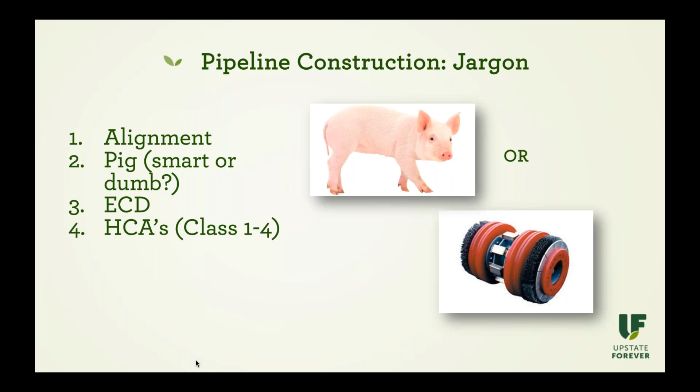And HCAs, that is a high consequence area. Essentially, it's a blast zone. They have different classes, 1 through 4, along the pipeline. Class 1 is the lowest risk, considered rural, 10 or fewer homes within 220 yards of the pipeline for any given one-mile stretch. Class 2 generally has 11 to 46 homes or apartments within that same 220 yards for any given one-mile stretch. Class 3 is 46 or more, or areas of public assembly such as churches, daycares, or schools. Class 4 is where buildings of 4 or more stories are prevalent, so it's pretty much an urban area. The reason those are important is they determine the depth at which the pipeline is buried, and we'll go into that a little bit more.

Now the basic components of pipeline: you've got your right-of-way, that's what you see there. There's a construction right-of-way versus a permanent right-of-way. For example, on our 55-mile pipeline, which was a 12-inch pipe, compare that mentally to say the 36 to 42-inch Atlantic Coast Pipeline. Our construction right-of-way, which you're looking at in that photo, was 75 feet, and the permanent right-of-way will be 50 feet across. That is the negotiated right-of-way for the pipeline.

Then there are access roads. Those can be temporary or permanent. Some are going to be temporary for construction, others permanent. They have to get at the pipeline to do certain things over time. There are laydown yards, those are temporary, just associated with the construction part. That's where they store things like the pipe and other equipment. Then there are the ATWS, additional temporary workspace. Those are sort of like laydown yards, just additional workspaces along the pipeline path. In our case, those ATWSs ranged from 1 to 18 acres in size.

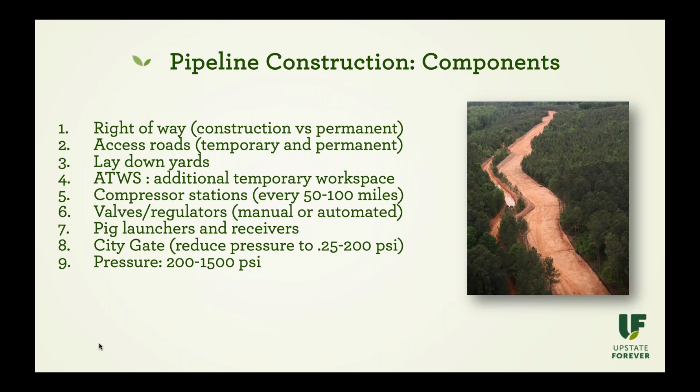Now, process. This is the overview. The pipeline construction process starts with clearing, grading, and trenching, then stringing, welding and coating, lowering and backfilling, and restoration.

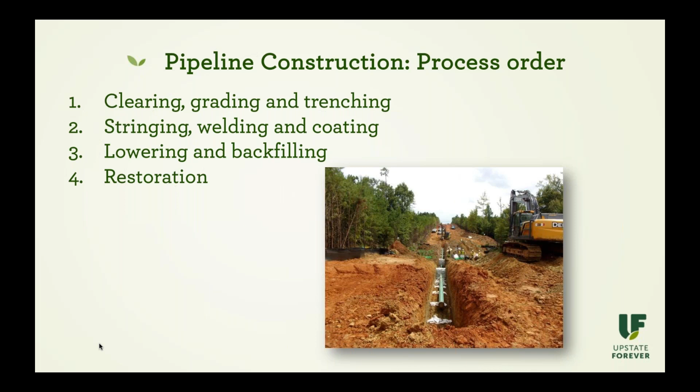Now this was an interesting situation. This is where the pipeline did not have permission at this point in time to go ahead and cross this property here, so it just stopped at the edge until they did get permission.

But this is basically what the right-of-way clearing looks like. It just plows right on through, and then the trenching. They use typical land clearing equipment for this, the usual stuff. The trenching, typically backhoes.

The trenches are at a depth of 30 to 36 inches in a lower consequence area. They can be as deep, so that's basically 3 feet under, in an ordinary place like this location here. This is obviously a low HCA. It's going to be 3 feet under, and that'll be relevant visually in just a couple minutes when I show you one of the problems we had.

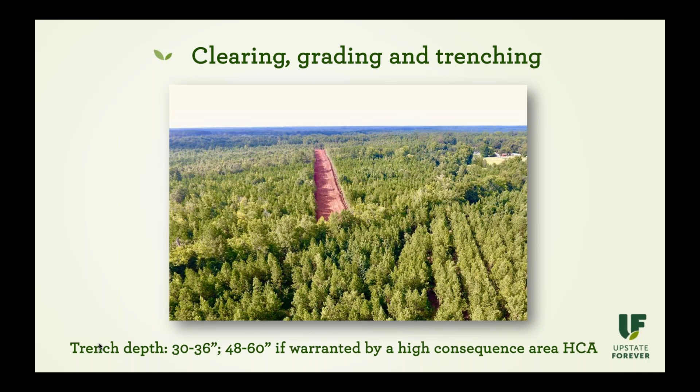Stringing is the process of laying those segments out. They do it in sections. They don't, for example, grade the whole thing, then trench the whole thing, and then string the whole thing. They'll do it in manageable sections that make sense to the topography they're dealing with and to what they can manage at the time.

Pipe segments are 40 to 80 feet long, and they are fabricated in steel rolling mills. Oh, and they actually bend them in the field. You'd think of a steel pipe as being something very stiff, but they can actually be bent to a certain degree in the field.

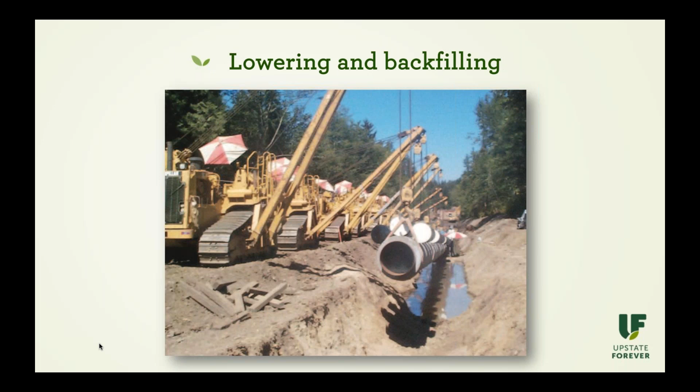And then you lower it, looks pretty much like this, and you backfill. And then once all that is completed, you get to the hydrostatic testing, the restoration, and I'll tell you a little bit about the cathodic protection.

Hydrostatic testing is basically once the pipeline is in the ground, they pressurize it and blast it full of water, checking for leaks. They do have to have an NPDES permit for this. They're typically drawing water from some local water resource, surface water if possible. So they'll hydrostatically test the whole pipeline, and then restoration takes place. Something to watch for is how quickly restoration takes place.

There typically are not very specific guidelines about this. And that was a problem in our situation, was restoration did not take place quick enough, and damage resulted because there was a lot of exposed dirt.

And then cathodic protection. Every pipeline has a coating on them, and I'll talk about that coating a little more in a few minutes, but they also have a cathodic protection system. This system uses a direct electrical current to counteract the normal external corrosion that occurs on a metal pipeline due to soil and moisture conditions.

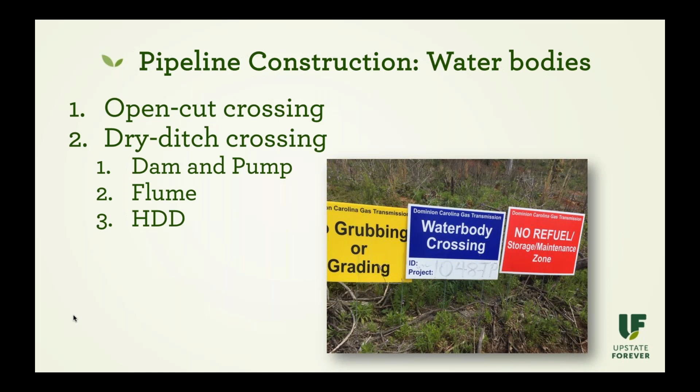Open cut is what we call a wet crossing. There's no stream diversion. The pipe is installed while the stream is running through it. And as you can imagine, if there's a lot of water, the sedimentation could be substantial.

These types of crossings are what you look for as the pipeline is being permitted. You need to know what your water bodies are ahead of time, know what the flooding characteristics of an area are. The more you know before you start this process of intervening or monitoring a pipeline construction process, the more you know what to look for.

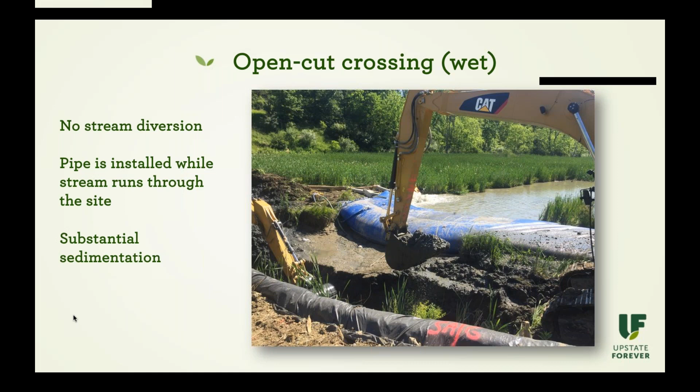As I said, we were learning as we went. So this is open cut. If you see in the permit application 'open cut crossing,' this is what they're talking about.

Now, dry ditch crossings. With dam and pump, the stream is dammed and the water is moved across the site via a temporary pipe and a pump if needed.

Now some states, I believe West Virginia, have their own stipulations on the Army Corps of Engineers Nationwide 12 permit that states these types of things must be completed within 72 hours. Other states don't have anything like that, I don't think South Carolina does. So that can be a big issue, is how quickly these disturbances are completed.

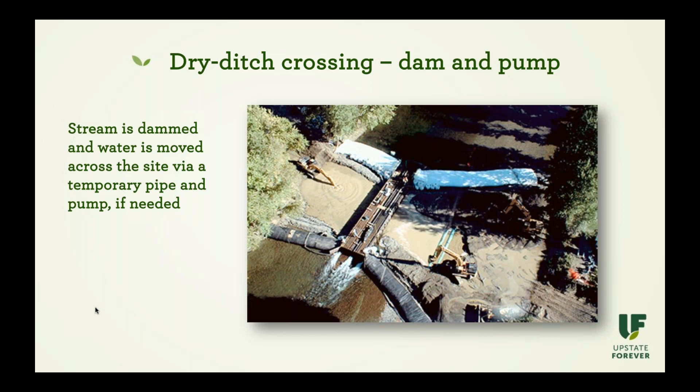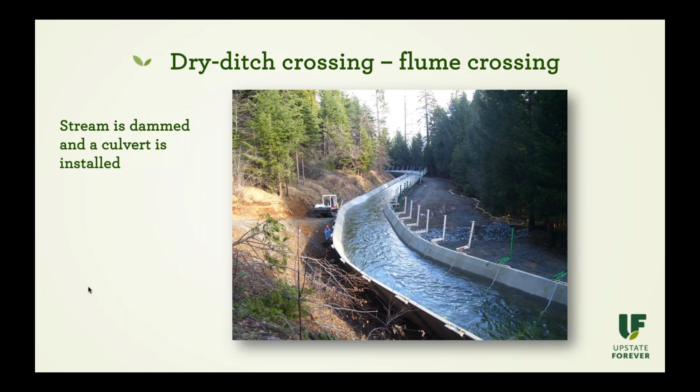And of course, with all of the above, the impact on the benthic community is going to be very significant. That's a lot of disturbance there. Can you imagine all the little mussels and crayfish making their way down that flume, along with what they feed on naturally? It's not going to happen. So the benthic disturbance is pretty significant in addition to the sedimentation.

HDD is going to be the preferred method, as will be obvious, and is going to be the most expensive method. But what they do with HDD is - and I'll show you what it looks like when it's done - first, they drill a pilot hole along a planned directional path underneath the water body. They can also do this underneath highways and railroad tracks. This is pretty much how they go underneath anything significant that they can't have surface level trenching for.

So they cut a pilot hole, and this is controlled via surface monitoring. Then the pilot hole is enlarged to accommodate the pipe, and that involves hydraulic cutting with drill bits and jet nozzles and hydraulic motors, or mud motors, to cut the harder soils.

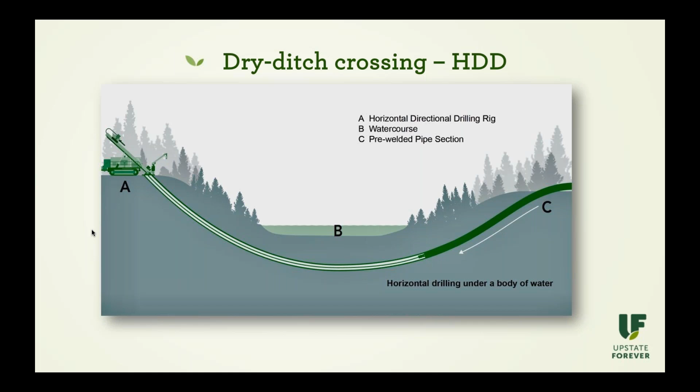And then when they're finished, the reason this is the preferred alternative is this: you don't have any disturbance along your riparian buffer, unless there's some erosional impact coming off the site that flows down to impact the water or the wetland in the middle. You still have that riparian buffer, all those trees, everything's still in place.

So this is by far the preferred water body crossing technique. It is going to be the most expensive, and so it's going to be resisted. We were able to get one of our creeks added to the HDD list, and that is a very sensitive creek, so that was a good thing. So that's what HDD looks like when it's done.

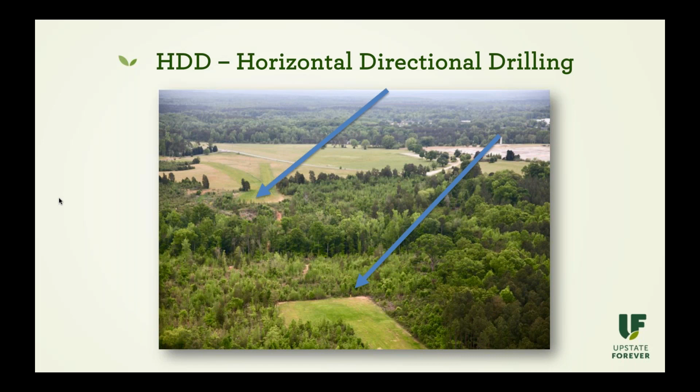With those x-rays, because there's such an emphasis on getting construction completed, the contractors are rewarded for being quick. There can be the issue of falsified x-rays, and that has to be monitored. Typically the only way that's found out is through a whistleblower on site. Although if there are other reasons to suspect, there is typically somebody responsible for quality control and inspection along the pipeline route — there is an inspector. They're contracted by the pipeline company, so take that with a grain of salt. So falsified x-rays at the welds are one potential problem.

2, 3, and 4, I'll go into a little more detail on: coating deterioration due to exposure, ECD — erosion control device failure — and then post-construction issues.

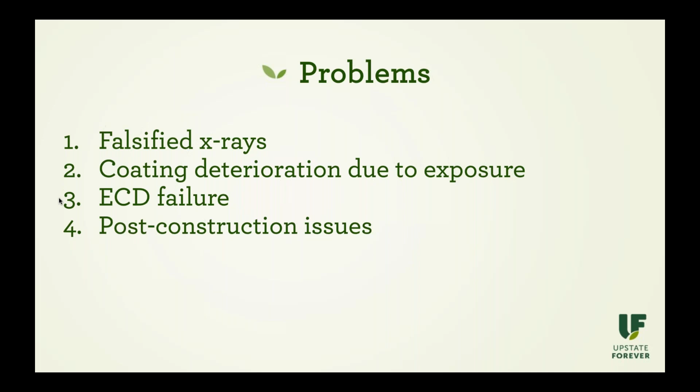So coating deterioration. The NRDC has noted problems with pipeline coatings. These are coatings that are there to prevent corrosion, but they may break down if the pipes sit for a while. From an October NRDC article, they noted that in a 2009 technical brief from 3M, some of the epoxy resins in fusion bonded epoxy, FBE, coatings have poor ultraviolet light resistance, and the coating could also be removed by wind and rain.

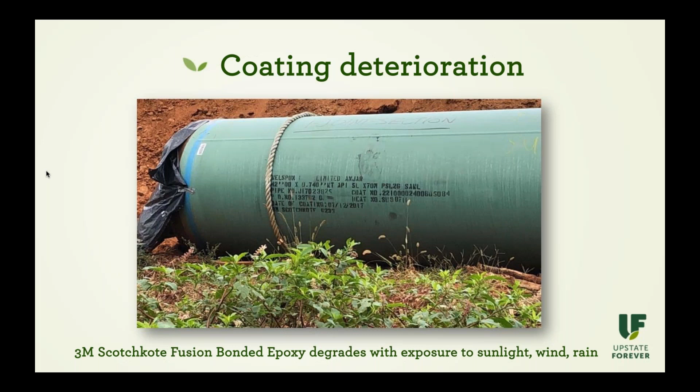And the National Association of Pipe Coating Applicators, yes, that is a thing, recommends not storing pipe in excess of 6 months without additional UV protection. Now, the date the coating was applied is stamped on the pipe, so that is an issue that needs to be monitored. For this particular pipe, they said that stamp is from 2017, and it has obviously been in the field for over a year.

And these are the ones you have to look out for, these tiny streams — they're probably never going to consider using HDD on. So this is what can happen if the crossing isn't conducted quickly and the restoration isn't conducted immediately after. You've got major sedimentation, major benthic impact, just a big mess.

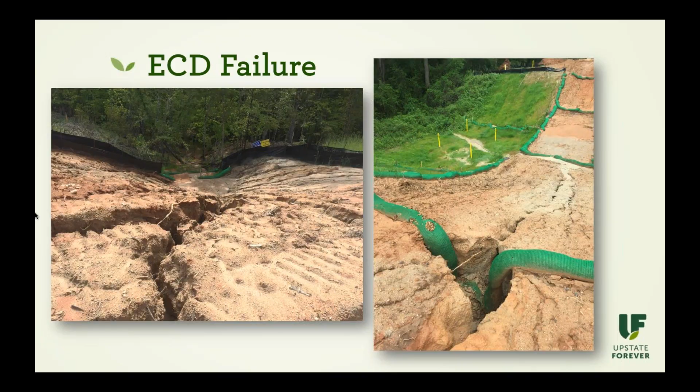So you have a high pressure 8-inch natural gas transmission line fully exposed to the elements there due to pop-up, which can happen during hydrostatic testing. I would hope that it happens less today, but again, these are in remote places, so it's hard to know everything that's going on. Although monitoring today is a lot more helpful, which we'll go over next week - ways to visually monitor a pipeline.

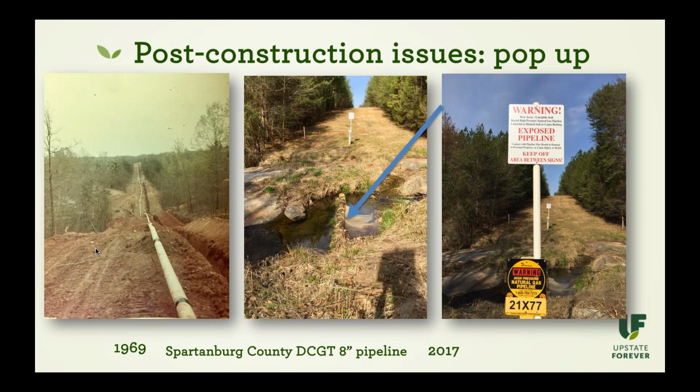And post-construction erosion. This happened again. The pipeline was placed into service - this was probably completed in early 2018. The pipeline was placed into service in March. That yellow line, that yellow pole, is the center line of this 12-inch, 1200 PSI pipeline.

As I was driving along, looking at various sites, I got out and inspected this. That gully is a good 12, 15 feet deep and is continuing to erode into the pipeline's right-of-way. And so that had not been noted in any of the inspection reports. I mean, that gully was just going to continue. Water does what water does, and it's not going to stop.

So that was something where it needed to be reported, and I reported it ultimately to PHMSA. It's now in the record. It can be monitored, but those types of things where you might have a gully encroaching from the side into the pipeline, that ultimately, if it's an area where nobody can see anything, it could undermine the integrity, particularly if it undercuts the pipeline - it undermines the integrity of the pipeline and can be a safety issue.

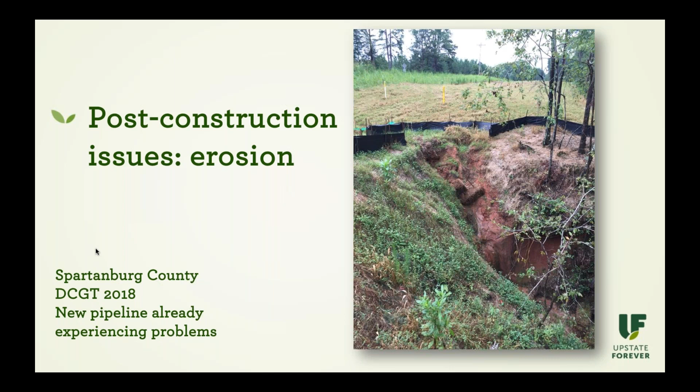So just to have these handy - post-construction safety regulation is handled by PHMSA, which is the Pipeline and Hazardous Materials Safety Administration, Office of Pipeline Safety. And they don't really have a lot to do with construction, but they do take over with the safety issues, particularly investigating events after the pipelines are operational.

And then there's a little bit of authority delegated to the state. In South Carolina, that is the Office of Regulatory Staff. It just sort of depends on where it gets put in each state - might be with the Public Service Commission in other states, but for ours, it's in the Office of Regulatory Staff, and they can inspect and regulate, but they cannot enforce safety issues. So it's part of the problem, there are so many different agencies responsible for different pieces of the pie. And of course, your environmental organizations are going to be involved in the issues that have environmental impacts, such as the sedimentation.

Now, dekatherms, what we've all been waiting for. One of our biggest challenges with our pipeline was understanding how big it was and getting a grip on what exactly it was going to serve. Why was it being built? The application talked about the anchor shippers and how much they wanted, but we really wanted to understand what that meant.

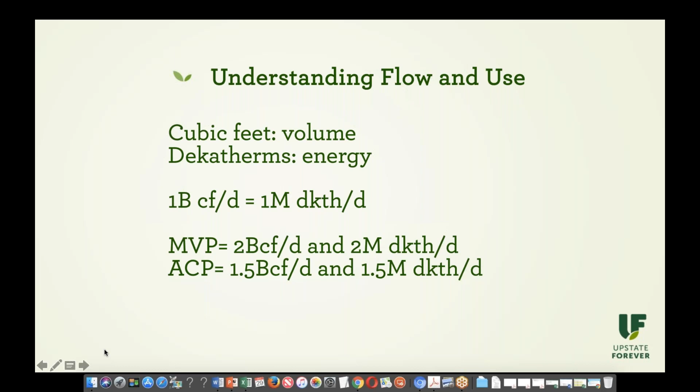So that's pretty simple. Ours are 42-inch, 36-inch pipelines. It just sort of depends on where they are as to how big they are. Those are big. Our smaller pipeline here in the 55 miler is 12 inches, and it is 80,000 dekatherms per day. So I'll talk a little bit more about dekatherms.

So how many dekatherms do different uses use? A 500 megawatt power plant, and that's actually a pretty big natural gas power plant, would require 84,000 dekatherms per day at peak, running at peak, not all the time. Industrial users range from as little as 30, 50 decatherms per day to about 3,000.

Then you're going to jump into a much larger category. I've seen one that needed 50,000, but they were making their own CNG, their own compressed natural gas for a fleet of trucks. But typically, a large industrial user is going to be about 3,000 decatherms per day. And then 1 million decatherms per day can fuel 5 million homes per day. So your little home is about 0.2 dekatherms per day.

So when you see an application and they talk about the different anchor shippers, you can kind of look behind that and make sure that makes sense. Is an anchor shipper a power plant? Is that power plant actually going to get built? And of course, it's going to differ between whether it's a combined cycle or a combustion turbine. It's going to differ, but this is just a generalization. And this is a combined cycle plant that I believe that I'm looking at.

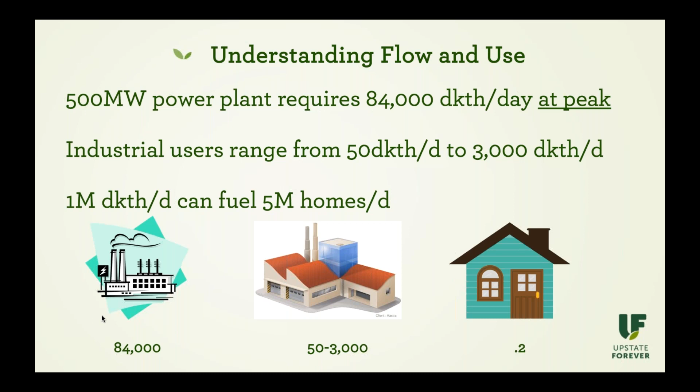Now, for the bigger picture, for example, South Carolina has about 900,000 dekatherms per day contracted capacity, all through Dominion Carolina's gas transmission. But generally, it uses about half that. So just kind of, if you think about the Atlantic Coast Pipeline being 1.5 million decatherms per day, or the Mountain Valley Pipeline being 2 million decatherms per day, and then the entire state of South Carolina, which is a pretty manufacturing intensive state, uses maximum right now 900,000 decatherms per day. And that's like one day a year when that level is pushed. And that's probably like the coldest day of the year when every gas plant's running full throttle.

So those are just things to think about with respect to capacity and the size of a pipeline that might get proposed.

Exports. This is something that's not gotten a lot of attention in the past, but it certainly will very soon, and I'll show you why. This is Elba Island in Georgia. This is an LNG, liquefied natural gas, import facility. It is currently being modified to export, and that is a growing factor. So liquefying natural gas for export, what you do is you drop it to minus 260 degrees, and by doing that you can reduce 600 cubic feet to 1 cubic foot. And then there's also some purification that has to take place.

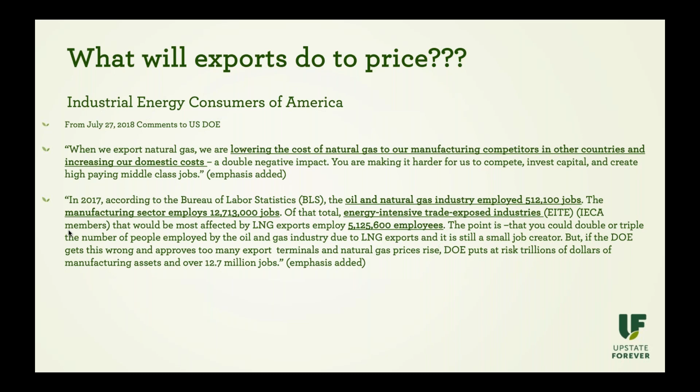That's something that we will continue to keep an eye on, and it will increasingly be in the news, I'm sure.

Now, for our last section, navigating the EIA, the U.S. Energy Information Administration website. We did the FERC website in episode 1. The EIA website is also a fascinating one. This one's just fun to play around with, and it's a source of a lot of data.

In order to see what our current energy infrastructure is right now, you go to the maps, and for that, you start with geography. That's the drop down at the top. Then you look for U.S. Energy Mapping System, and that pops up this very, very cluttered map.

It's too much to look at, but it has layers, and you can turn those layers on and off. If you click on those layers, you see all those things, you can turn them on and off, and you can look at just natural gas infrastructure.

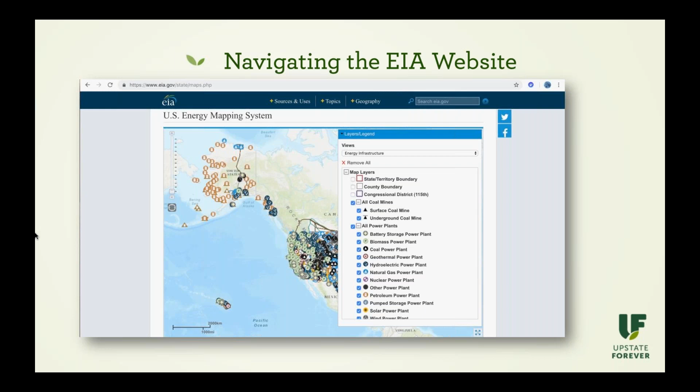Now, the interesting thing here is I keep checking on this, and our 55-mile pipeline that was completed and put in service in March still doesn't show up on this map, in South Carolina, but everything else seems to be there. You'll notice the Atlantic Coast Pipeline and the Mountain Valley Pipeline are not on this map because they aren't completed yet either. So there's the interstate natural gas pipeline infrastructure per the EIA website.

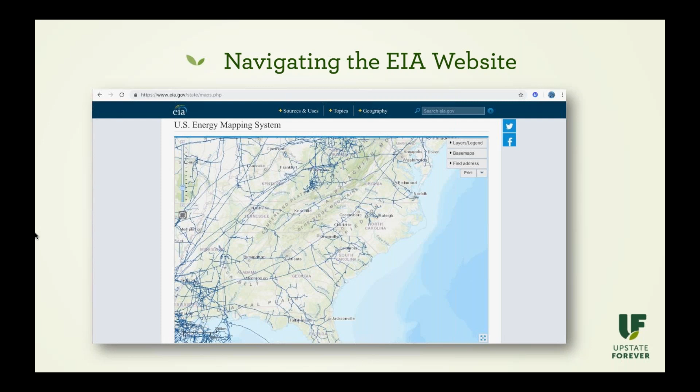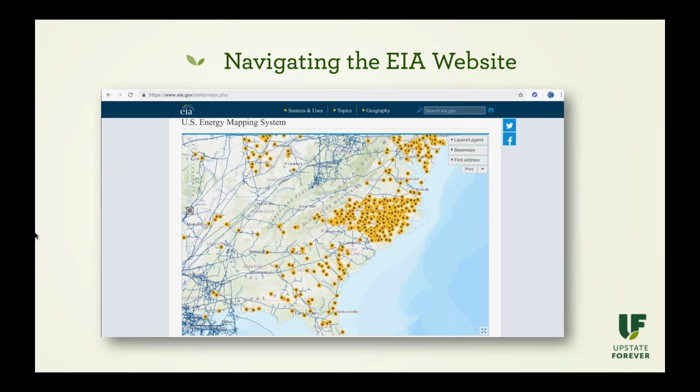And then you can see the pipelines that go down to Elba Island. You can turn on more than one layer at a time. We can look at, ooh, that's solar, see how many solar installations there are. It's very interesting to watch the solar change over time. South Carolina is not looking quite as good as North Carolina right now, but hopefully that will change over time.

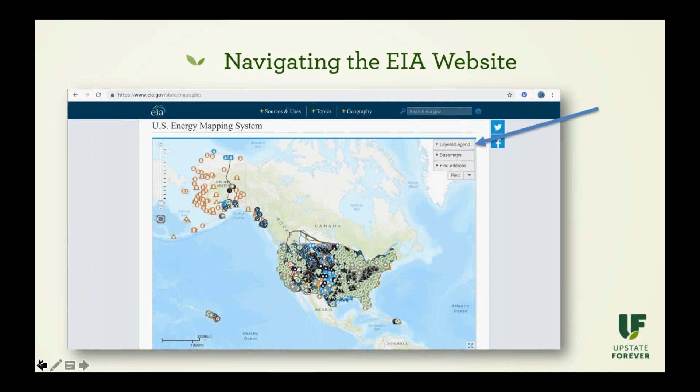Those are great suggestions, so let's see if I can go back and just double check with the pipes, the stringing. Let me look at all these pretty pictures again.